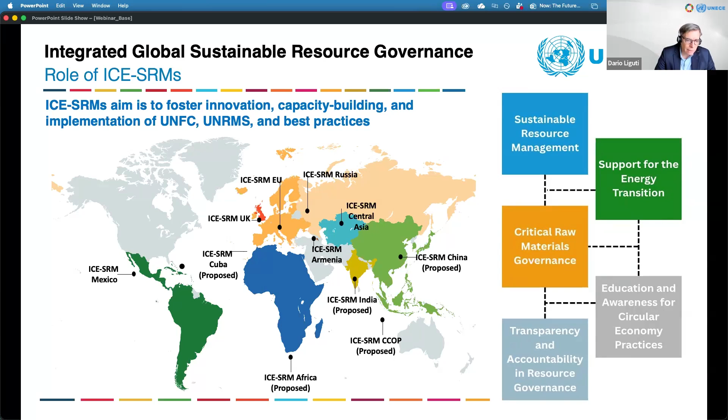So what is the role of these centers of excellence and the network? It's a platform for cooperation. In this case, the UK is at the forefront of bringing forward the circular economy and showing the rest of the world how to deal with it and how to enhance it, particularly in developing countries where it's still a very nascent idea and policy.

Capacity building, this is an example of the capacity building, whether it's seminars, papers, training opportunities, etc. They use the knowledge hub that we have established on our website, which contains plenty of knowledge and training material for the different stages of preparation of people around UNFC and UNRMS, which is available to everybody.

And of course, they drive impact. They are there to drive policy, to drive industrial decisions, to drive the sustainability concept across resource management, but not only there, also across industry. So certainly that is the main, biggest impact and biggest objective of the centers of excellence in driving sustainable resource management.

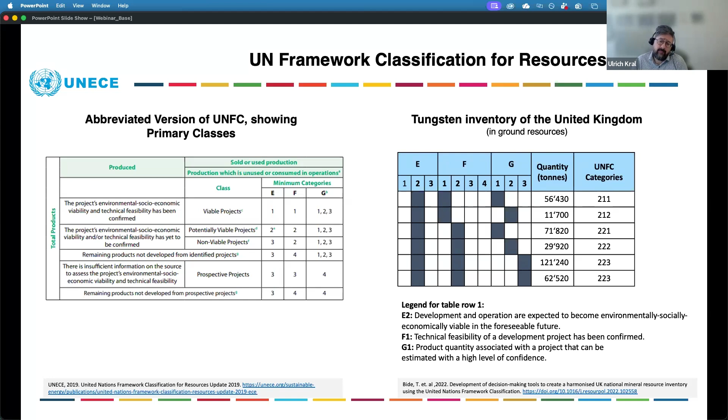My last slide is about critical raw materials, the link to the CRM Act and to the UNFC. So how does this all fit together? As you might know, steel requires alloying elements — this could be molybdenum, zinc, manganese, or other types of elements used to improve the specifications and performance of the steel.

Quite a number of these alloying elements are critical, according to the European list, but also according to lists in Canada, the United States, Australia, and other countries and regions. Securing access to these alloying elements, some of which are critical, is essential for the steel industry in order to provide the performance of the steel. The policy response, at least in the European Union, is the CRM Act, which aims to guarantee or enable access to critical raw materials for industry.

Two points from the Act. The first is that the Act defines benchmarks for critical raw material supply by 2030, which is in about 4 years. It defines benchmarks in terms that 10% of CRM supply should be sourced from mining, 40% of CRMs should be processed in Europe, and about 25% of CRMs should be sourced from recycling processes — which is quite ambitious, let's say.

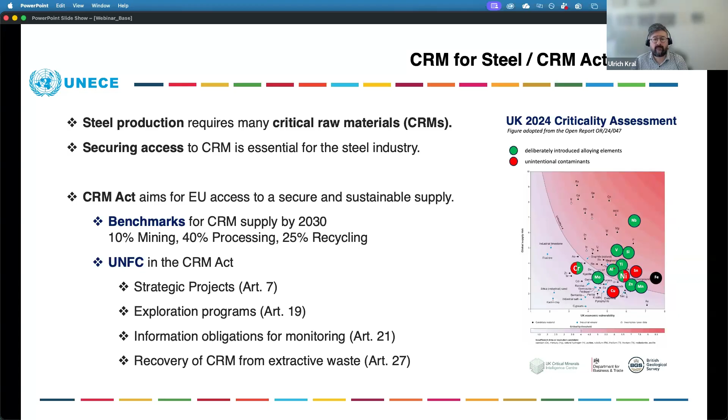That's all. Thank you for listening and thank you for your attention.

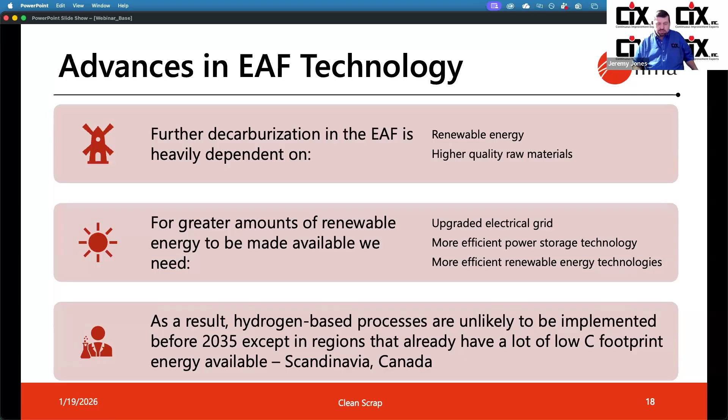So if we look at advances in EAF technology, we always have to look at the raw material demand with respect to the technology. Further decarbonisation of EAF is heavily dependent on renewable energy and higher quality raw materials. The higher the quality of the raw materials, the more energy efficient we can be in the electric arc furnace. There are challenges around the renewable energy side of things, I'm not going to spend a lot of time on that. There's a lot of focus on hydrogen-based processes, but these are unlikely to be implemented before about 2035, except in regions that already have a very low carbon footprint energy available, like Scandinavia and Canada.

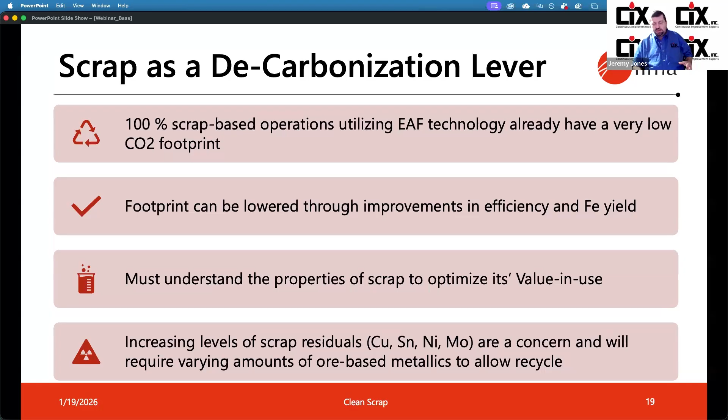Next slide, please. So scrap is a decarbonisation lever. 100% scrap-based operations utilizing EAF technology already have a very low CO2 footprint. The footprint can be lowered through improvements in efficiency and improvements in iron yield, but we have to understand the properties of the scrap to optimize its so-called value in use. Increasing levels of scrap residuals like copper, tin, nickel, and molybdenum are a concern and require varying amounts of ore-based metallics to allow recycle. These are elements that can't be removed from the steel bath.

Next slide, please. So it's impossible to talk about decarbonization without considering raw materials. The single biggest cost for the EAF steelmaker is the metallic charge. The future of EAF steelmaking is about maintaining a sustainable balance between ore-based metallics and recycled scrap. The more we do to improve scrap quality, the less dependence we have on ore-based metallics. That leads to greater sustainability and improved circularity. It goes without saying that the maximum recycled steel scrap can only be achieved by improving scrap quality.

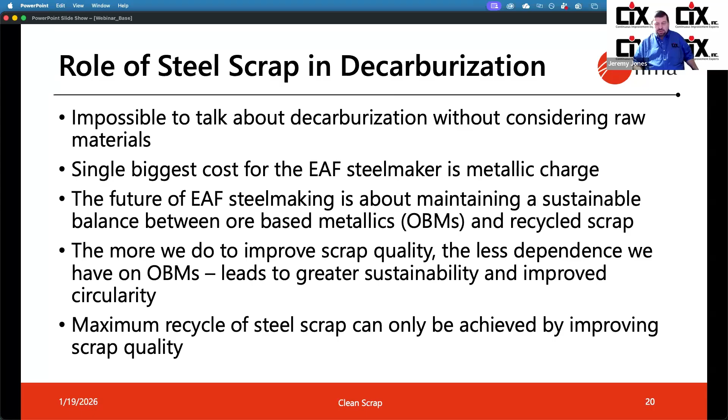Next slide, please. So these are some of the challenges that we faced over the last few years. It's important to know, even though under the guidelines now, scrap is treated as having a zero CO2 footprint, but realistically, the CO2 footprint of recycled scrap is dependent on the scrap quality. So in Europe, CO2 taxes will drive us to deliver a higher quality scrap product. Next slide, please.

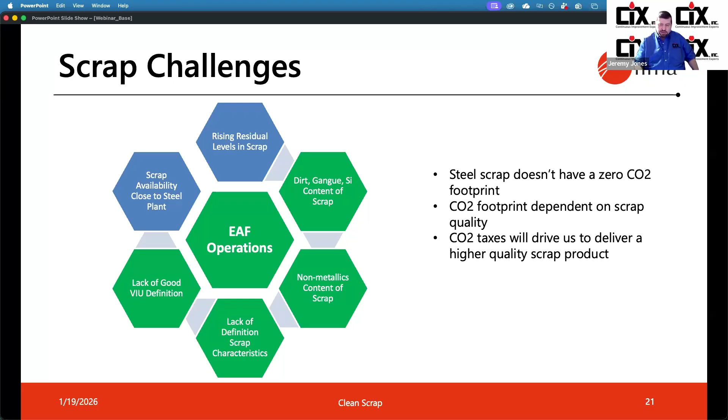But we have to look at these contaminants. I've already talked about the residuals. Extraneous materials like plastics, non-ferrous metals, wood, oil, grease - these are the greatest contributor to environmental issues associated with electric arc furnace operation, and also contribute to the CO2 footprint. So it goes without saying that we should be trying to remove these materials from the steel scrap before we put the scrap in the furnace. We don't want to use the EAF as an incinerator. Then we also have another one, which is dirt. This results in increased flux requirements, increased energy consumption, yield losses, and decreased productivity. 1% dirt increases the CO2 footprint by 43 kilos per ton of liquid steel.

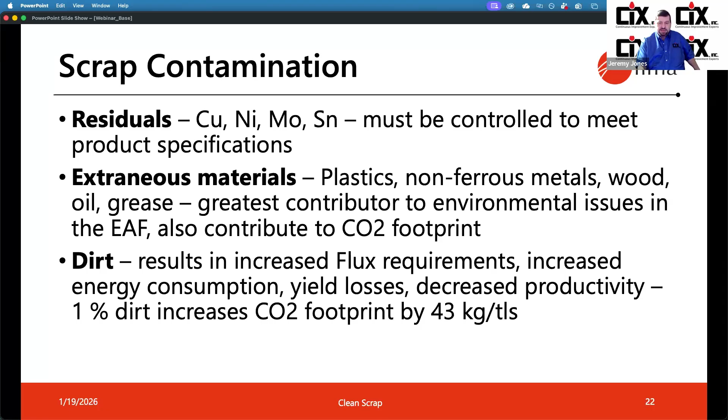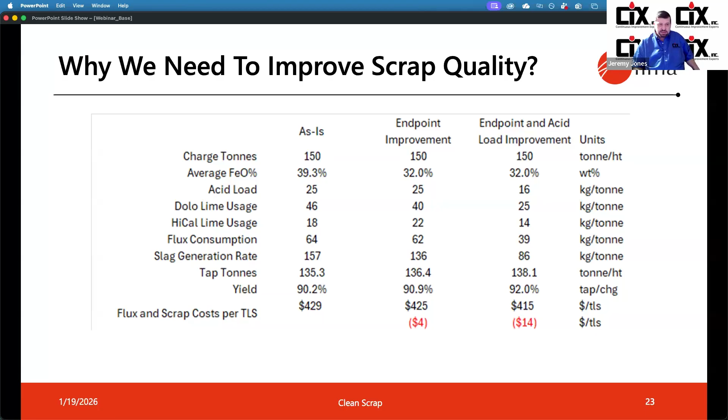So the scrap grades that can be upgraded. Well, the scrap grades, and I'm using the North America designations. We have fairly well-defined categories in North America because we've been operating EAFs essentially since the end of World War II, actually during World War II.

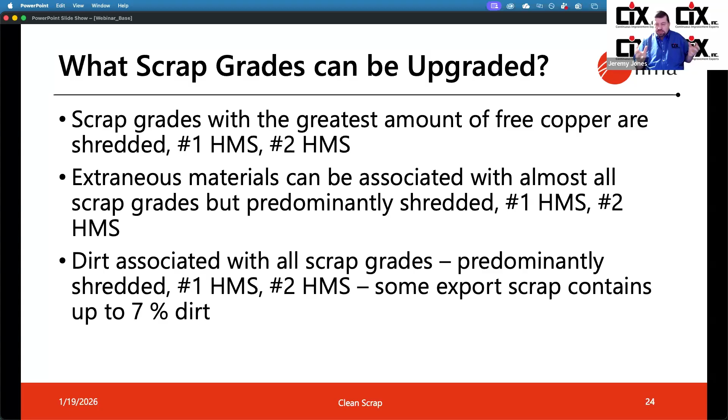So the scrap grades are the greatest amount of free copper, which is copper that's not contained in the steel itself but is coming along for the ride in the recycled material, are shredded and heavy melt. Extraneous materials can be associated with almost all scrap grades, but predominantly shredded, number 1 and number 2 heavy melt. And dirt can be associated with all scrap grades, but again predominantly shredded HMS. To put it in context, some export scrap can contain as much as 7% dirt.

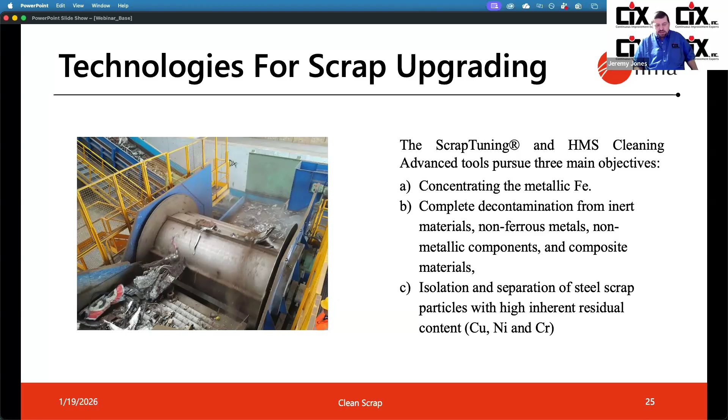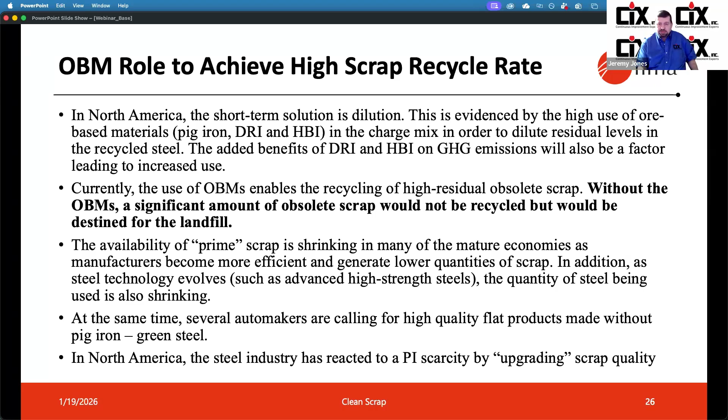And then we also have some industry sectors now calling for green steel, so-called cleaner products made without pig iron. A big push in North America was the Ukraine conflict, which resulted in a shortage of pig iron. Faced with that shortage, several of the larger mini mill groups embarked on a program to upgrade scrap quality. Next slide, please.

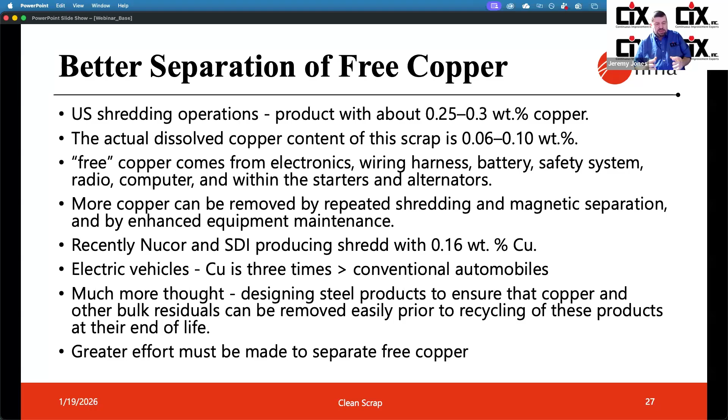So part of the circularity is also putting much more thought into designing steel products to ensure that copper and other bulk residuals can be removed easily prior to recycling at end of life. So greater effort must be made to separate the free copper. Next slide, please.

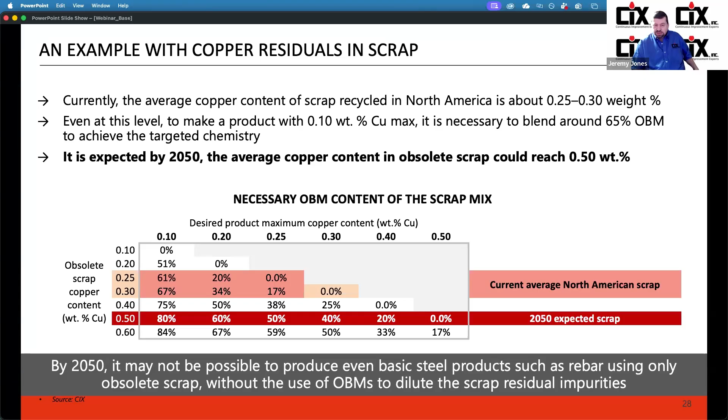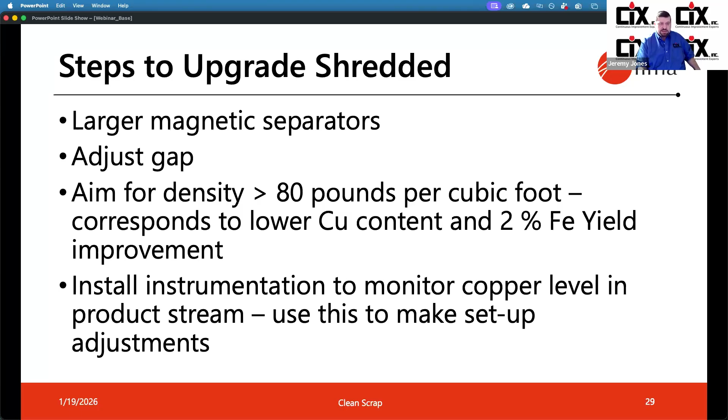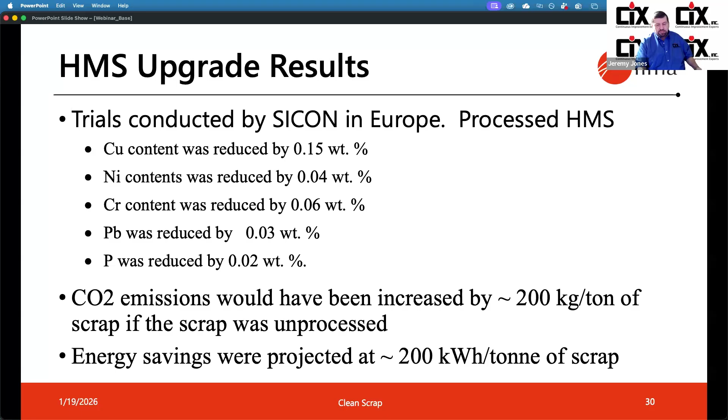Next slide, please. The trials we conducted with SICON in Europe, you can see we removed a considerable amount of free copper, nickel, chrome, lead, phosphorus, and it had a huge impact on both a reduction in carbon footprint and a reduction in energy requirements. Next slide, please.

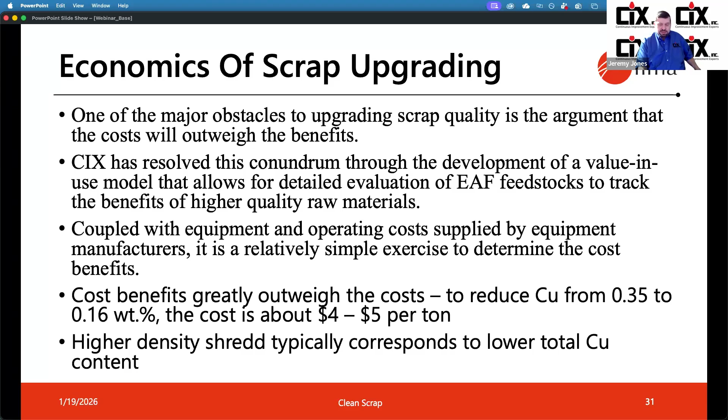So one of the major obstacles to upgrading scrap quality is the argument that the cost would outweigh the benefits. We've developed a value-in-use model that we use to assess this, and what we have found is that the cost benefits greatly outweigh the cost. To reduce the copper from 0.35 weight percent to 0.16, the cost is about $4 to $5 per ton. And then the higher density shred that results is typically much better for EAF operations.

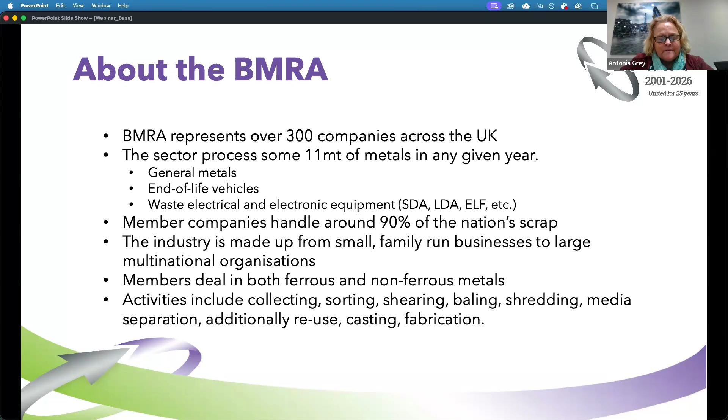Next slide, please. So green steel is essential for net zero decarbonisation, and it has to be recognised that recyclers have a huge role to play in the steel sector's journey to net zero. In and of itself, the sector has very low emissions - as you can see, just 0.07% of the UK's emissions. And I think when we transition, as you will see in the second figure, to electric arc furnaces, then that amount comes down even more. And we are part of that - they can benefit from our scope 3s, just as we are a little bit hamstrung by the scope 3 emissions from the steel sector.

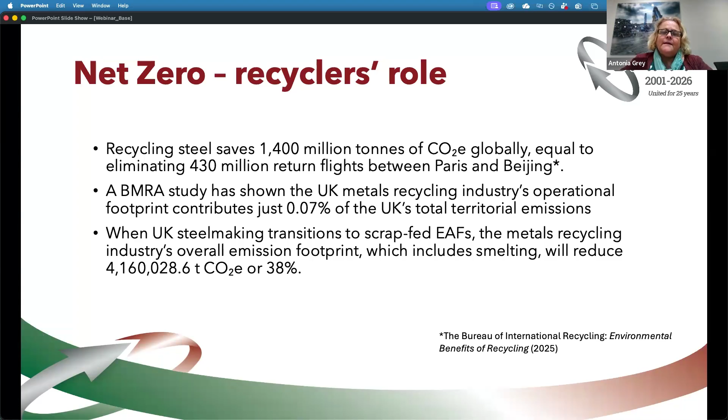Next slide, please. So apologies, it's a little bit of a confusing slide, but it's just to give you a basic idea of how the metals recycling sector works. As a sector, it's like a triangle. You have a lot of small businesses collecting and sorting the metals, processing and moving it forward and up through the chain until you get to operators that run shearing and baling. Now, some of that shear will be HMS 1 and 2, as mentioned earlier by Jeremy. That will be sent domestically to smelting directly or exported.

Then we come to the shredding process. It's a very basic image courtesy of BIR, which is the Bureau of International Recycling. A car goes into the shredder, it goes through the mill, lots of hammers. It's reduced into smaller pieces, then through things like magnetic separation, lasers, eddy currents. It's separated out into 3 fractions: ferrous metals, non-ferrous metals, and residue.

And as you can see, the images on the right-hand side, you've got 3B, so basic shred of steel. Then you've got mixed metals, which is copper and aluminium, and they'll be sent to a downstream separation plant to pull out. And then you've got the automotive shredder residues, known as shredder residues, which will go for further processing and then appropriate disposal. It's not perfect, we know this. We know there is free or extrinsic copper in the mix. So obviously we need to think about this.

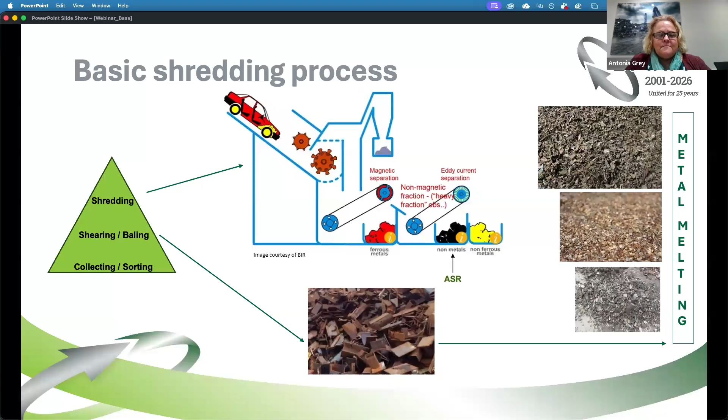Next slide, please. So there are 3 things to think about - well, there's lots of things to think about, but if we bring it down, there are 3, not necessarily in the order I've given, but it seems to make sense. So: design. Next slide, please. So just as Jeremy said, we need to go back to the designers and make it not only easy to reuse, repair and remanufacture, but also to recycle. They need to stop manufacturing for ease of manufacture and think about end of life.

They can make it simpler, and that's why I have a gecko on my slide - simply because we need to think about autotomy in products. Just as a gecko will lose its tail, surely we can come up with a way so that, just as, again, as Jeremy said, we can pull out the wiring looms from a washing machine really easily. There's no way it comes out in one cassette and then it's put to one side. So I think we need to just make it a little bit easier to pull it apart and recycle.

I think we also need to rate products on recycled content and recyclability, just as we have energy ratings now, A, B, C, D. I think it's important that we rate them so people know, and I think this could be mandated at a higher level to say you have to sell it with the green credentials.

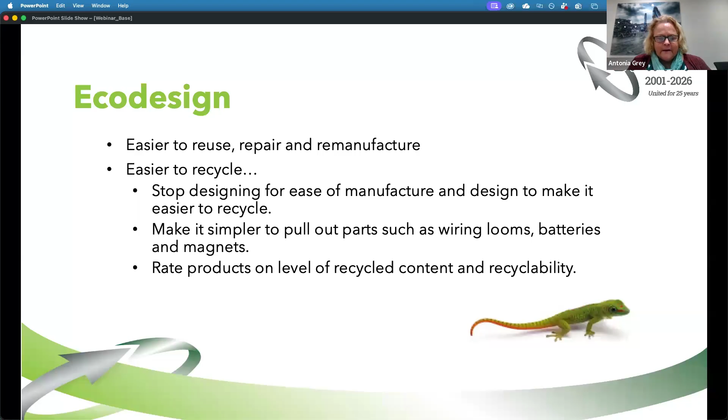Next slide, please. So perhaps the most important challenge that we face - again, Jeremy's alluded to much of this - but we know that we have to change. We know we need to meet the needs of a changing steel industry, and it's becoming about chemistry. As Jeremy said, technologies do exist, but they come at a cost of adaptation and having better space. We need better segregation, and that comes again with space.

There's changing throughput. They exist - Jeremy said you have to run it through twice, or put it through a different separation method. And we need to adapt downstream separation as well.

I will make one caveat on behalf of the metal recyclers. I have consistently been told that the income scrap operators make from extracting the extra copper will cover the costs of upgrading and reprocessing. It's not working that way. There's more regulatory burdens that we face - for example, copper fines are designated as hazardous waste. So we need to change our processes, but we also need more permitting, hazardous movement permits, all this sort of thing. So there's additional costs.

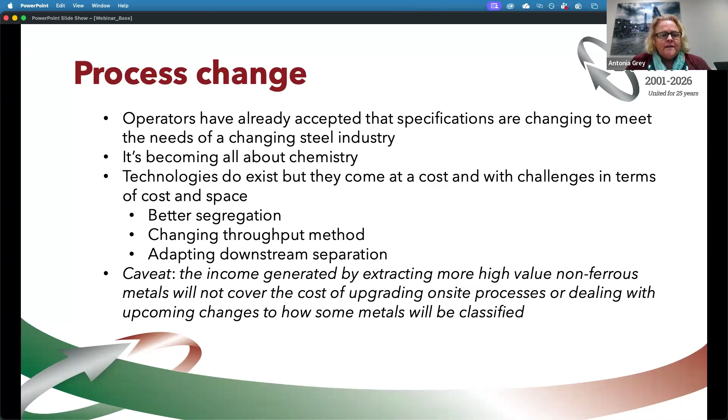So speaking of which - next slide, please. I want to talk about externalities. There's a lot of issues we're dealing with as a scrap processor. In the UK, we've got high electricity costs. I know that's very specific to the UK, but not specific to the UK is the cost of dealing with and moving hazardous waste.

There's a lot of hazardous waste being found. Shredder residue is hazardous waste - that's because of the TPH, copper fines, and it's not just copper. We're going to be looking at zinc, looking at nickel. And then there's a growing list of persistent organic pollutants, POPs. They're found in cars, in the bumpers, in the block between the engine and passenger cabin, in the seat foams, and they have to be irreversibly destroyed. So that's another cost to pull them out and deal with them.

And then again, as Jeremy said, the changing nature of scrap - cars are becoming more plastic, less metal. So we have to adapt for that. We have to see where we're going to get the scrap from in the future.

And finally, I'm going to come back to it - you get what you pay for. We are having conversations with steel producers saying we can reduce this grade you're asking for, very low copper, about 0.1 as we said, but that does cost. We have to deal with running it through twice and extra separations. And I think it's also time to begin telling consumers that the days of cheap white goods are probably over.

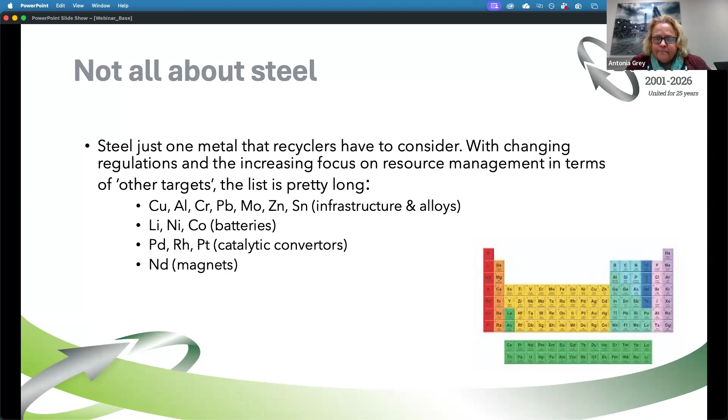At the global scale, the goal for one material shouldn't adversely affect another. They all have to be treated as equal, because they are everywhere in built materials. So the more we learn, the more we can extract, but we need to be careful. I think we also need to add procurement into resource management. Governments need to say they need green procurement, stop relying on linear, and say we have to buy green. So yeah, that's the end of mine.

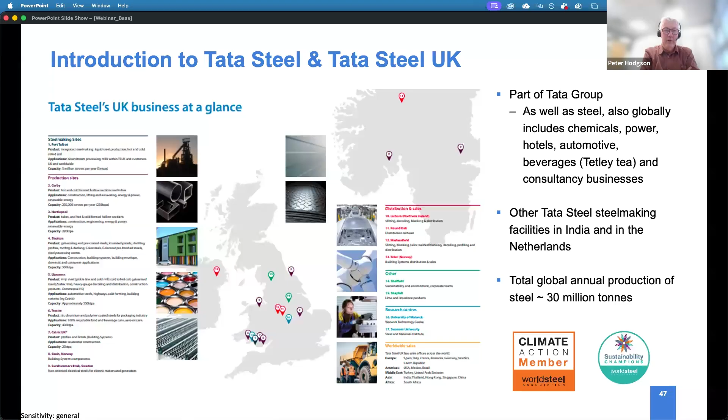So I'm going to give the perspective of a steel company, Tata Steel, that I work for. Very brief introduction: we've got global assets mainly in India, Thailand, the Netherlands, and the UK. But for most of this talk, I'll be giving more of a UK perspective.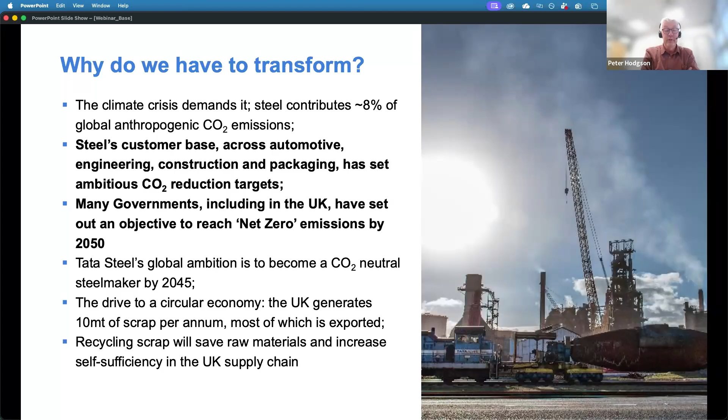And then there's a couple of other drivers around Tata Steel's own global ambitions to become a CO2 neutral steelmaker by 2045, circular economy, and the UK position around scrap. But I'm going to focus mostly on those points in bold around market and customer drivers and through government's public procurement. Next slide, please.

Just a very brief recap on some of the main decarbonisation technologies being considered by steelmakers around the world. We've got things like carbon capture, utilisation and storage. We've got things like hydrogen-based steelmaking, and we've got scrap, as we've heard, as being a very important decarbonisation lever. And we've got various combinations of those, and there's no one size fits all solution.

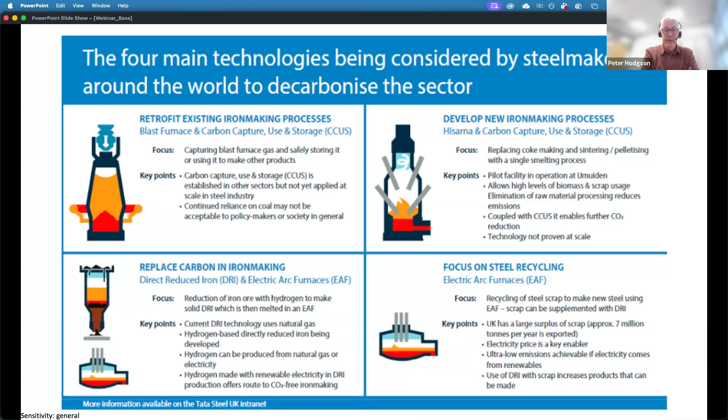The different solutions will apply in different regions according to resources like cheap electricity, like green hydrogen, and so on. But in the UK, as we'll see, the main imperative, or the main movement, is around using scrap and electric arc furnace as the decarbonisation approach. Next slide, please.

So you get this lag between demand for new steel and availability of scrap, and even out to 2050, and probably the end of the century, as others have already said, there's going to be this ongoing requirement for ore-based metallics to meet the demand that can't be met by recycling scrap, even though scrap at end of life is very well recovered, with very high recovery rates. But there is a point that's already been made about the gains that can still be made by improving those recovery rates at end of life - thinking about end of life, greater segregation, designing with end of life in mind.

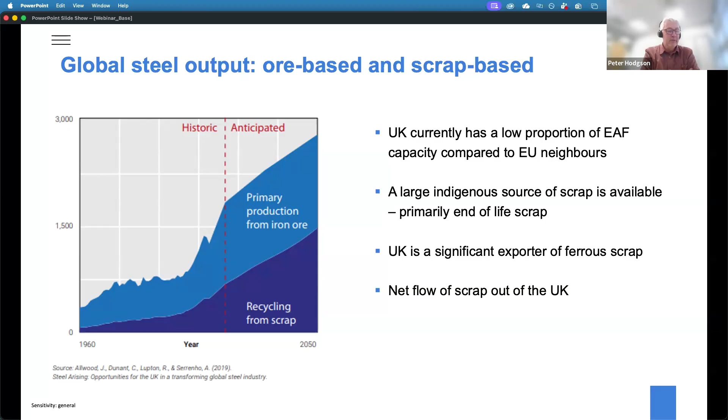Very important points. Just on the text on the right hand side, there's some context around the UK at the moment, because the UK is a relatively mature economy and doesn't have a lot of arc furnace capacity at the current time. The UK is a significant exporter of ferrous scrap - there's a net flow of scrap out of the UK.

Okay, next slide, please. So yeah, scrap is a strategic resource in the UK, and for that reason, Tata Steel is going down the route of transforming its steelmaking assets in the UK, installing an electric arc furnace at its facilities in South Wales, not too far from where Cameron is located.

That arc furnace has been mentioned already, it's been designed to use an element of ore-based metallics as well as scrap, but will be predominantly scrap fed. There's various other investments there which I won't go into as part of the overall plan, but that arc furnace is currently well under development and installation in the UK as we speak.

Okay, next slide, please.

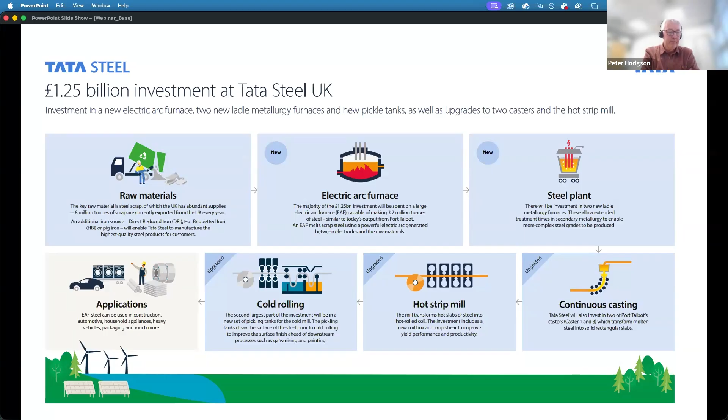So what does this mean in terms of our customer perspective? Very clearly, I think to most customers and users of steel, the steel that they buy from steel companies forms a large part of their Scope 3 emissions. So when our customers are looking to set their own decarbonisation targets, they're looking very closely at the purchased goods and services, where that includes steel.

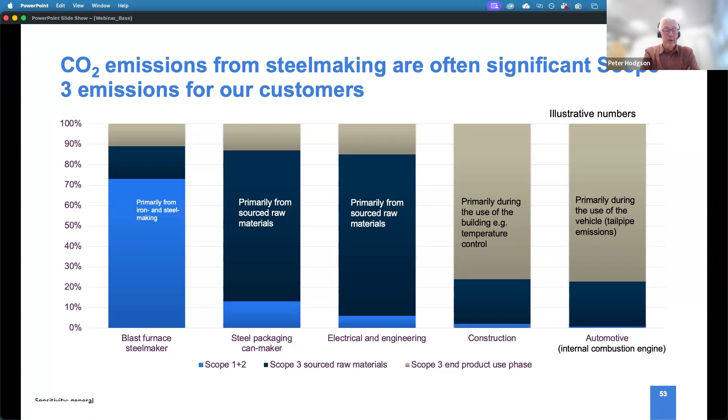If our customers are setting targets, how do we measure our progress against those targets? Okay, so next slide, please.

And then just one more click, we'll bring up one of the responses to that. There's really a lot of endeavour, a lot of work going on to harmonise across these rules, guidelines, and standards, and one manifestation of that is a World Trade Organization-led initiative, along with many other partners, including World Steel Association and Tata Steel. Many other steelmakers have endorsed the steel standards principles, which is calling for the establishment of common methodologies for measuring greenhouse gas emissions, product carbon footprint along the supply chain. That's a really important piece of work, and features at things like the COP Conference of the Parties meetings every year, with updates on that.

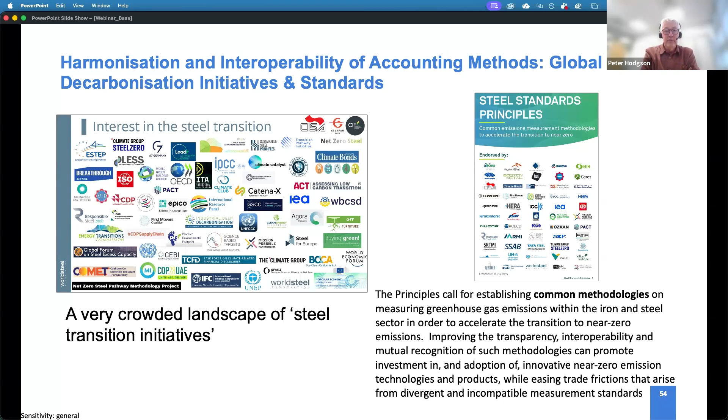So then, just to go into a little bit more detail, next slide please. Yeah, some customers are setting their own targets, requesting carbon emissions data from their suppliers, from steelmakers like ourselves, and these include things like Science-Based Target Initiative, things like Responsible Steel, things like Low Emission Steel Standard (LESS), things like the Global Steel Climate Council. They're all ways in which those guidelines and standards, and the measurement of low carbon, low emission steel, can be demonstrated. Often these are around a 2030 target, maybe 50% less carbon emissions by 2030 from some baseline.

So yeah, just to highlight one there, Steel Zero. That's a construction focused commitment. The members of Steel Zero will have committed, in order to be a member, to buying 50% of the steel they use in construction products as low carbon emission steel by Responsible Steel's definition by 2030, and 100% of the steel they buy for their projects should be net zero steel, low emission steel by 2050, just as one example.

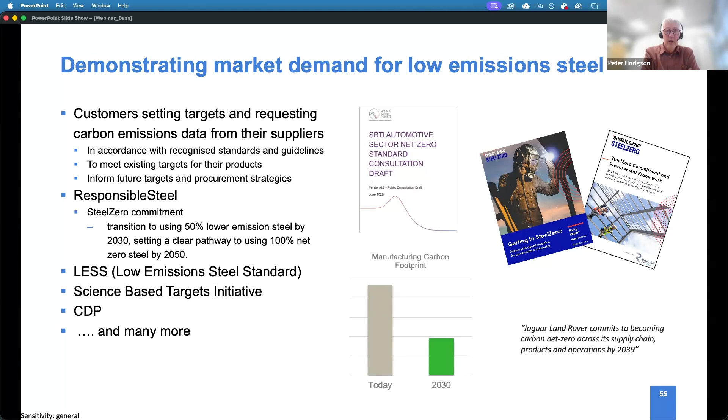And then the next slide shows some further examples where these kinds of classifications, these standards, have been incorporated into more legislative aspects or regulatory public procurement type thinking.

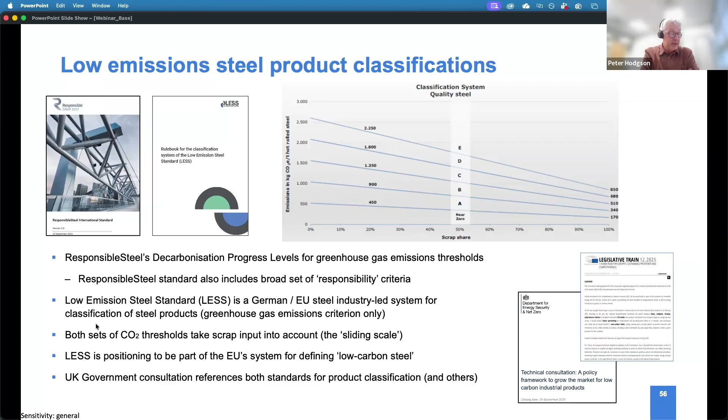Next slide, just one further complication into the way in which standards are being developed, and that is chain of custody models. These are very much a hot topic at the moment.

People will be familiar with how things like green electricity are provided through chain of custody models. Things like bio-based inputs are presented through chain of custody models in the chemicals and plastics industry, for example. There's a lot of discussion in areas including the steel sector about how these models might be applied to account for or offer low carbon emissions steel to help with investments for future decarbonisation. It's very much a live topic that is part of that broader discussion around harmonisation.

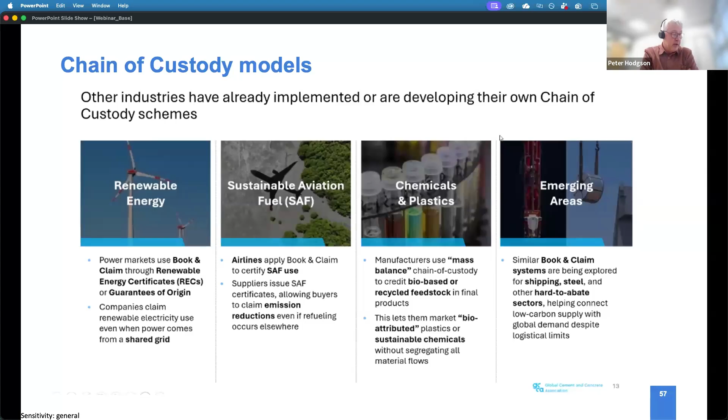And then the final slide - behind all of that is the need for really credible carbon footprint information and transparency, and this is where things like environmental product declarations and environmental profiles, third-party verified, need to be really clear about what methods have been used and be totally transparent about that. And that's me, back to you, Cameron.

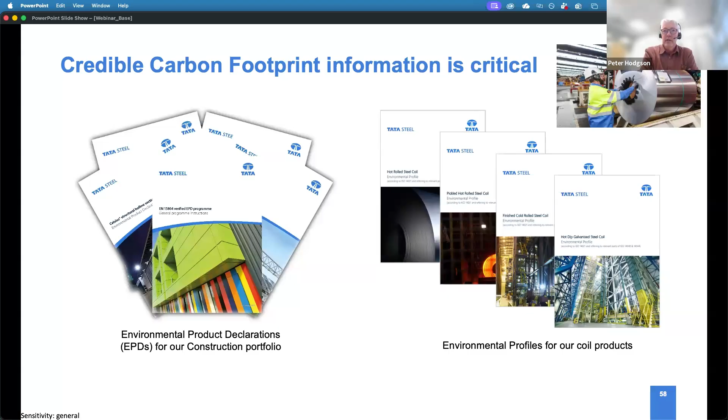Thank you so much, Peter. So what I'll try to do now, acknowledging that we're a little behind time, is go through this relatively quickly. We understand a bit about the UNRMS and why it's so important, about the tools, and we've got details across the supply chain around the challenges but also the opportunities that exist in this space. So what I want to talk about now is ways in which this can be applied using those tools, managed and also monitored using those tools as well.

Next slide, please. I probably should have said this before, but a lot of this work is done by my wider team, and Ulrich Kral, who's on the call here, will be joining the panel later on - he's the real expert in this area, so you can ask him some questions later.

This is a slide from one of our partners within the CSM at Exeter, and they've really done a lot of the early work looking at how the UNRMS can be applied to different scenarios. Most of those scenarios up until this point have been in the area of critical minerals from primary sources.

Really, you can split this up into three different parts. The first one is you need to determine what your priority is - I'll talk about that in the context of steelmaking in just a second. Then secondly, you need to look at the fundamental principles of the resource management system itself.

So how do we look at the responsibility to the environment, our social responsibilities, what practices we need to encourage to look at the circular economy solutions that have been proposed already as part of these talks. And then finally, the governance - that's kind of just popping out the UNFC, which was introduced earlier on in the talks. This block diagram here is essentially just a way of being able to visualize that.

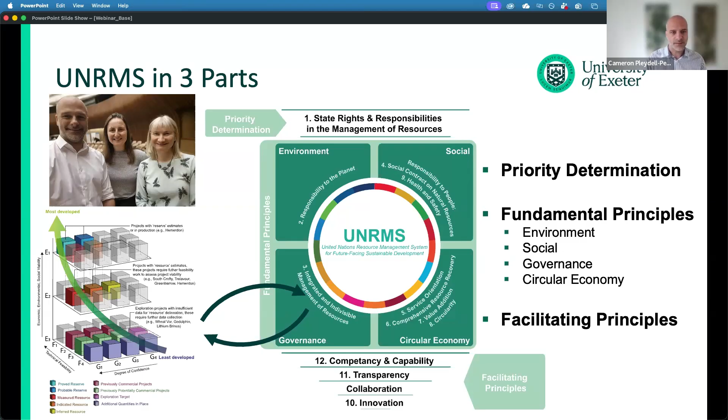Next slide, please. How does this apply to the question at hand? The good news is I don't have to repeat a lot of the things that people have already said, and you should be well grounded now in some of the challenges and opportunities that exist. My summary of this is, if you start from the left-hand side of this slide at the top and move along to the right-hand side, it's effectively that our method of managing this up until this point has been that we have been really good at producing loads and loads of products.

Moving along, that means alloys get harder to produce because they become more advanced and the tolerances in the manufacturing process get tighter. So over time, our room for error gets smaller in producing steel alloys. The current problem is that if we put all of this into a large pile, as both Antonia and Jeremy pointed out, you end up mixing a lot of different things together.

That can result in these residual elements that Jeremy was talking about. If we set our priority for the resource management system to be maintaining these sources at high quality over the next 30 to 40 years, we need significant interventions in both the product space and the design space, but also in the end of life space if we're going to solve this problem.

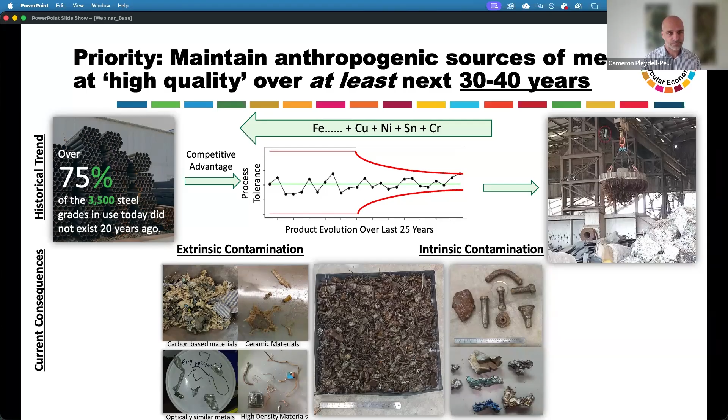So how do we do that? Well, the first thing is that if we look at that middle part at the top, we need to reverse this product development trend. We need to look at redesigning our alloys to make them more resilient and more robust, so that where we have higher levels of contamination coming in through increased recycling, we're able to manage that better. That means we need to increase our room for maneuver, so we need to approach it from that end.

Moving to the right-hand side of the slide, we do need to stop packing everything into a pile and recirculating those elements across the top. To embed this sort of circularity, we need to collect more data. This is around the transparency and service orientation elements of the resource management system.

There are lots of initiatives I'm not going to go into detail on today because we don't have the time, looking at how you can manage data across supply chains more effectively. Peter alluded to some of them in his previous talk, but there are others around the construction product regulation, for example, the battery passport coming through within the EU, where we're looking at both mandated and voluntary approaches to tracking data as it goes through the supply chain.

On the proviso that we get that part of our resource management system correct, that allows us to do the value addition and resource recovery discussed in previous talks. We need to separate out these components of the scrap and send the elements where they need to go. If you want to produce a car, you need a lot of iron but not much else in relative terms. If you want to produce a small modular nuclear reactor from Rolls-Royce, for example, you're probably going to want some iron, some nickel, and some chrome.

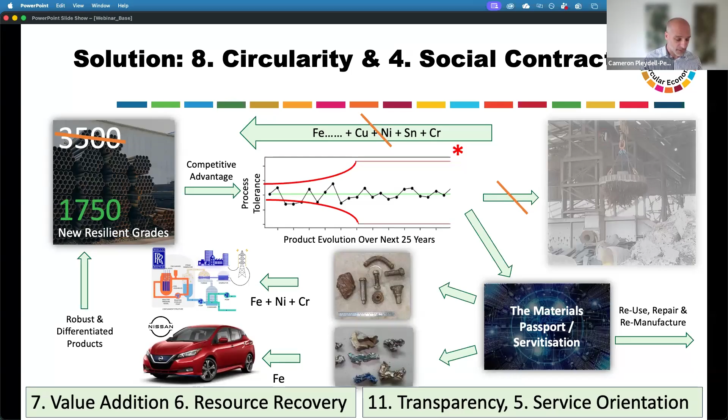Next slide, please. I'm just going to quickly zip through some examples of how we're using some of the information we've collected both within my group, but also similar to work presented by other presenters today, which fits into that governance piece, managed through the UN framework classification. I'm going to talk through three different examples, one from each of three different axes, very quickly to save time.

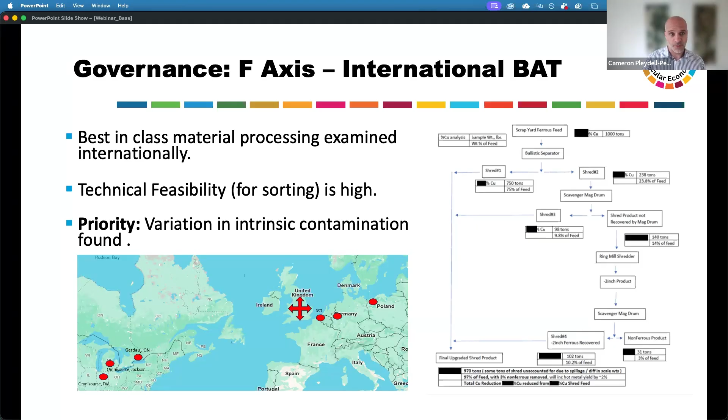The first is around the technical side, and Jeremy's already told the story really, but effectively Richard has also been out and about across the world looking at different sorting and separation practices, all the different methods of processing and reprocessing, and how many times you need to process the material. Antonia talks about that as well. We've reached the same conclusion as Jeremy, which is heartening: the technical feasibility is actually really high. So this is effectively an F1 project wherever you want to go, because the technologies exist. Next slide, please. Let's now consider the E-axis and look at the economic approach.

Are you vertically integrated? Are you just buying from the market? Do you have a different, a JV or something? So the way that you configure your supply chain and manage the flow of your material, what's the strength of the relationship with your customers? And then finally, as a function of these different places where you are, there are very different policy costs depending on where you're operating. So the E-axis score can be 1 in certain places, it can be 2 in others. There's definitely potential. It wouldn't score any lower than that, but there are some issues to overcome.

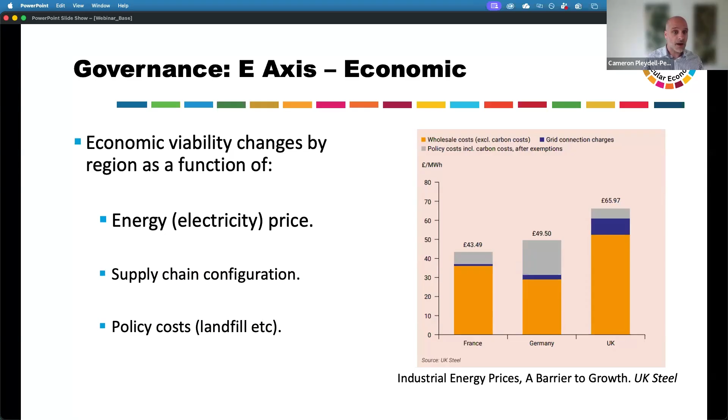Next slide, please. And then G, this is where it gets even more complicated. So now, just remember looking at the resource availability. And for mining, this is kind of easy, but for, well, not easy actually, but it's easier than it is for anthropogenic resources. The reserves that exist for anthropogenic resources will change with the interest rate. So if the interest rates go up and the purchasing power goes down, people are less likely to allow stuff to reach the end of life, and then the availability of scrap will decrease. So it's not like looking at a mine where you've kind of got given reserves.

But even within that, we've already seen these challenges that exist around how you monitor the quality of that material. There are two approaches which we've examined. One on the left-hand side is confidence in estimate. This is effectively where you build an inventory of material across, in our case, for our study, the UK, and look as a function of our consumption and production tendency within the UK, roughly what level of inherent copper, so this is copper contamination within the material itself, not the free copper that Jeremy mentioned earlier on.

That's one way. The other way is to simply dig into the pile and start measuring. And that's also something that we've started to do. The key point I suppose to make here is that if you look at the whole pile as one distribution, it becomes extremely difficult to do. But if you look at this as a function of a compound distribution, where you're looking at individual constituents of that pile, it becomes slightly easier to do, and you get finer distributions which allow you to predict what the elemental flow might be into the future. So comparing one to the other, you get good agreement, and that gives us confidence.

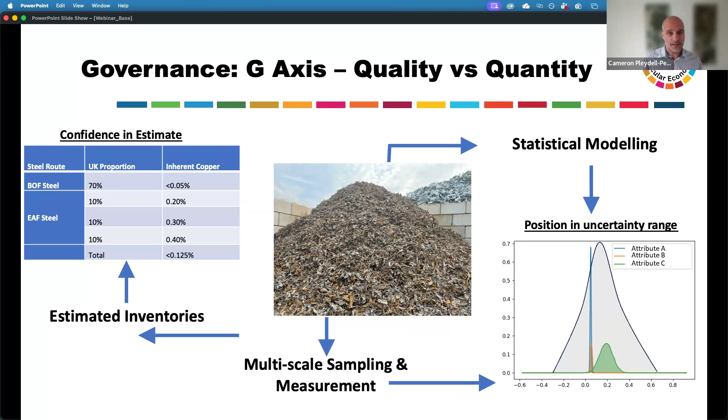So moving on, the potential impact of this, of course, is that you can reverse this process. You can apply your model of the distribution compared to the composition, superimpose that back on your pile, and then actually proactively select material from that, and try to generate a composition. At a scientific level, this is something we've attempted in the lab. The results are presented below for one alloy. No ferroalloys were used for this at all. This is all just on the basis of the composition of the scrap that was charged.

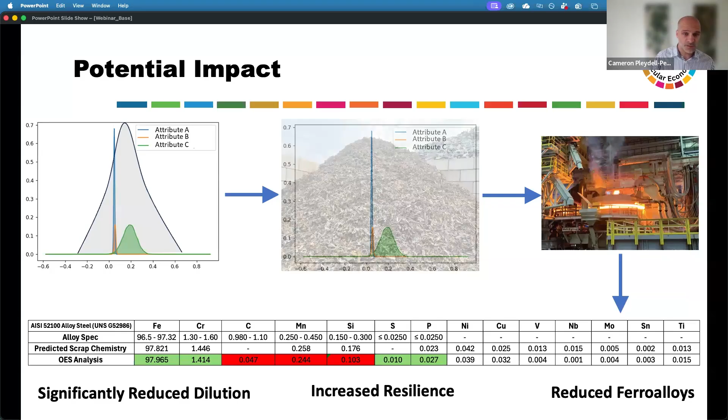And the potential benefits here are reduced levels of ore-based metallics, increased resilience for the process and your supply chain itself, and the reduced use of ferroalloys, which can be critical materials, as Ulrich pointed out earlier on. Next slide, please. And this ultimately has significant decarbonisation benefits, which change as a function of the type of product that you're looking to try to produce. So by connecting the composition requirements of the products to the potential interventions in the recycling space, you can start to understand from an E-axis and environmental perspective what sort of benefits you would likely get. And you can roll all of this up into the UNFC and the UNRMS and help that to support you to make decisions and assess your projects.

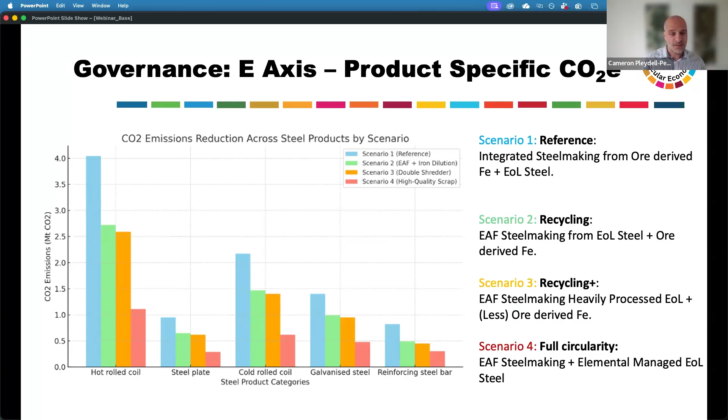Next slide, please. I'm going to skip over this one in the interest of time, but that's the detail behind how it was achieved, which I'm happy to address in a question if that sparks some interest. So in summary, I'd like to say that a holistically sustainable solution to steelmaking is not simple. And when I say holistic, I mean both environmentally sustainable and economically sustainable. Resource management practices that overlook this complexity will never deliver that holistic sustainability.

The UNFC and UNRMS are unified and internationally recognized tools that help us capture this detail without having to present it continually to everybody all the time when trying to make decisions. And so we at the ICE SRM are here to help and support you to try to achieve that.